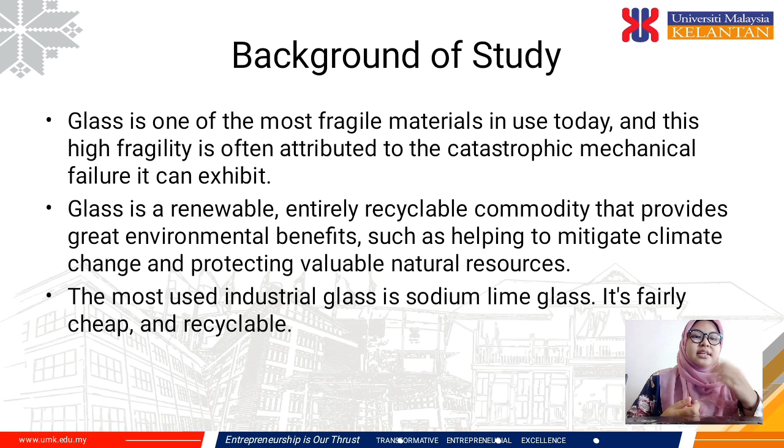In addition, the most used industrial glass is soda lime glass. It is because it's cheap and it can be recycled. Go to the problem statement for this study. As I said before, glass is a fragile material. That's why the industry came up with a mechanical strengthening technique, which is ion exchange, to reduce the fragility of

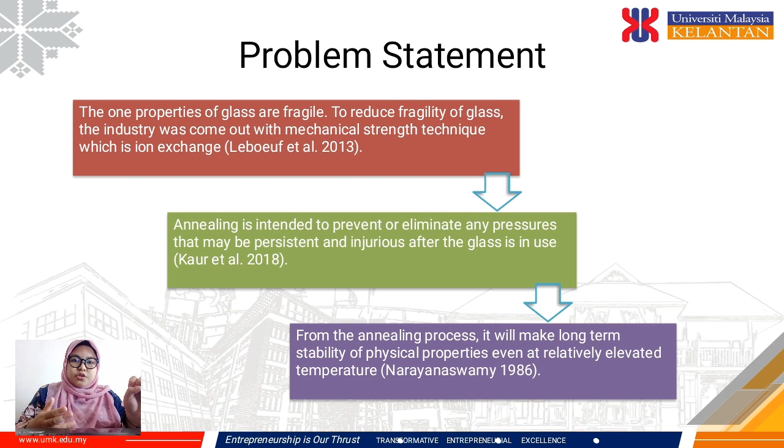glass. Next, the annealing process is also intended to prevent or eliminate any stresses that may persist after the glass is in use. The annealing process will give long-term stability of the physical properties of glass even at relatively elevated temperature. There are three objectives that need to be achieved in this study.

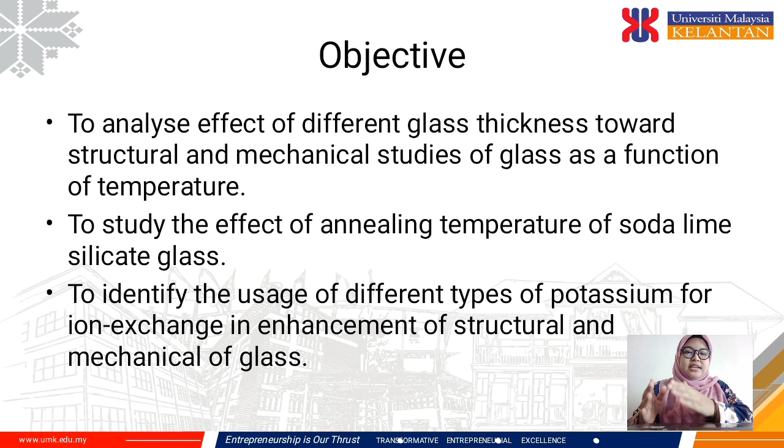First, to analyze the effect of different glass thickness towards the structural and mechanical studies of glass as a function of temperature. Second, to study the effect of annealing temperature on soda lime silicate glass. And last but not least, to identify the uses of different types of potassium for ion exchange in the enhancement of structural and mechanical properties of glass.

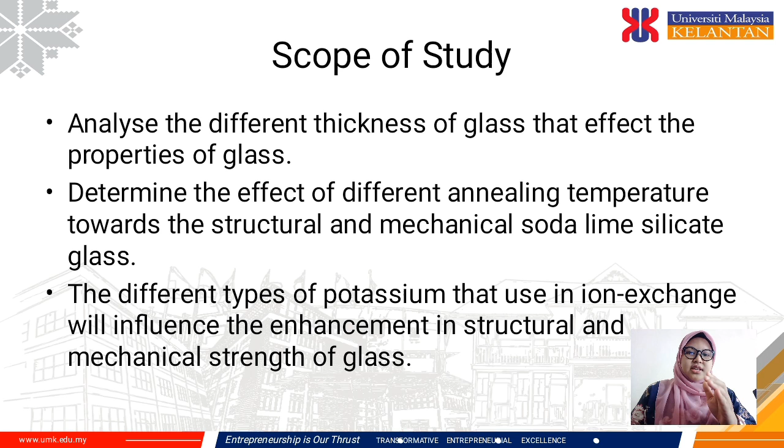Next, we go to the scope of the study. First, I will analyze the different thickness of glass that affects the properties of glass. Then, I will determine the effect of different annealing temperatures on the structural and mechanical properties of soda lime silicate glass. And last but not least, the uses of different types of potassium in ion exchange will influence the enhancement in structural and mechanical strength of glass.

We go to the significance of study. The different thickness of glass and different types of potassium in ion exchange are to be observed in this study. Which glass has the superior performance after being annealed? This is to avoid us choosing glass that has low properties based on its application. The production of glass with high quality and best properties will also be improved.